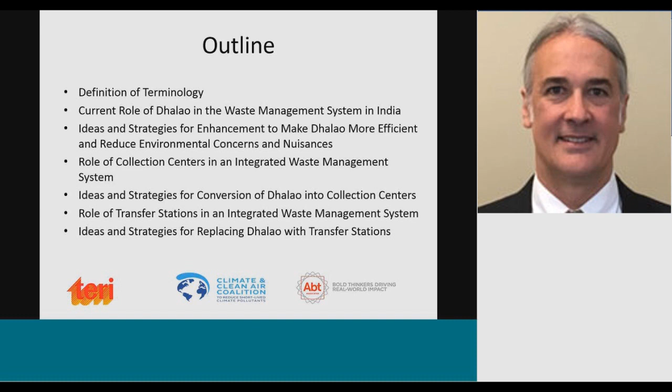I wanted to start with defining some terminology so we're all understanding how I'm using these terms today. A Dhalao is any form of a three-walled bay or bunker or building structure, typically constructed of concrete or block, and it's utilized for the collection and aggregation of solid waste from residential and commercial waste generators. Typically, the waste is tipped at the Dhalao manually by a municipal waste collector or cleaning staff, Safai Karamchari, and the Dhalaos are typically not equipped with any container.

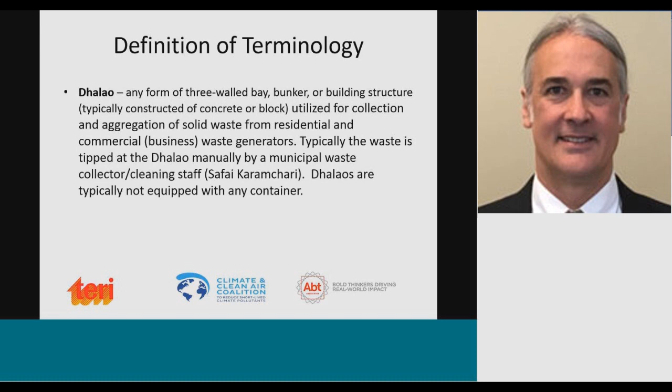A collection center is a facility established for collecting solid waste and recyclable materials from residents, and in some cases small businesses or institutions. This is a facility where individual residents can dispose of waste in bulk storage containers, and they're serviced by collection vehicles. A collection center typically does not allow commercial waste, and it does not have waste collection vehicles tipping waste there.

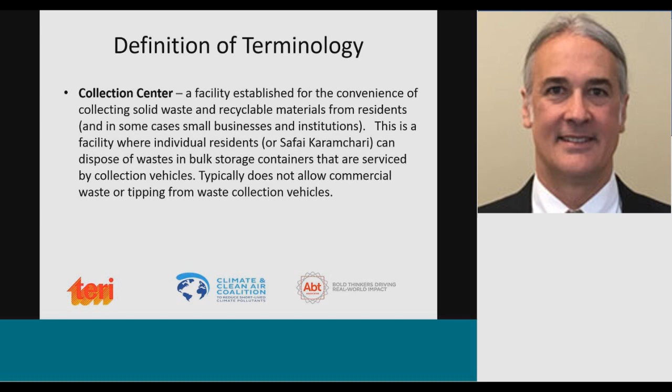And finally, to define a transfer station: it's any solid waste storage or collection facility at which the solid waste is transferred from collection vehicles to containers or larger long-haul vehicles for transportation to a central solid waste management facility for disposal, incineration, or resource recovery. Typically, transfer stations don't allow for manual tipping of waste, and they're not used by individual residents or businesses.

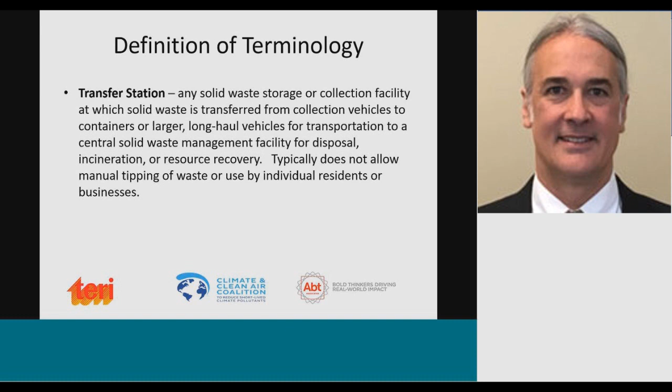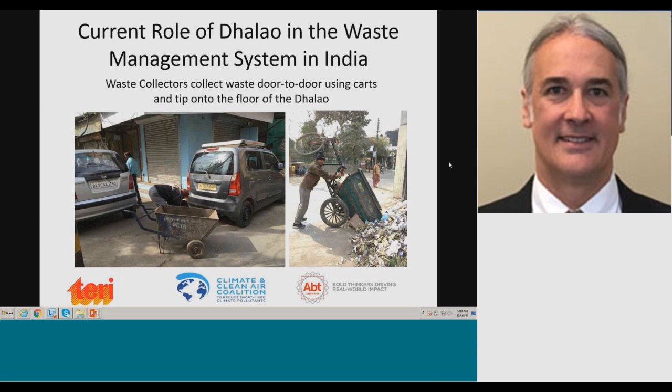The current role of the Dhalaos in the waste management system in India: waste collectors collect the waste door to door using carts of various shapes and sizes, and they tip it onto the floor of the Dhalao. The waste is aggregated from local neighborhoods and surrounding communities, and the conditions at the Dhalaos involve tipping solid waste directly onto the floor within the Dhalao and also in front of it for collection.

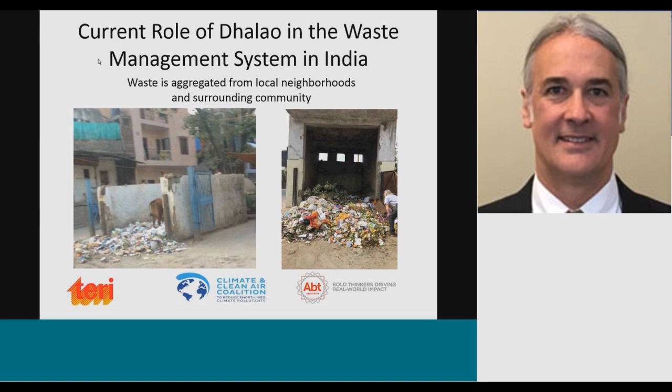Servicing the Dhalao requires a front loader and dump truck to extract the waste from the floor. This is an intensive process requiring multiple manpower and equipment in order to pick up the solid waste from within and surrounding the Dhalao using the front loader, then placing it into the truck to be transported to the disposal facility.

The challenges with the current role of the Dhalao are the inefficient handling of the waste multiple times. It generally has a relatively small storage capacity, and the waste is not containerized. It contributes to traffic congestion and unsafe conditions during servicing. It has to be serviced frequently throughout the day as the Safai Karamchari, the waste collectors, continue bringing waste to the Dhalao. There are nuisance concerns, odors, appearances, livestock and animals getting into the trash, and potential environmental and health concerns.

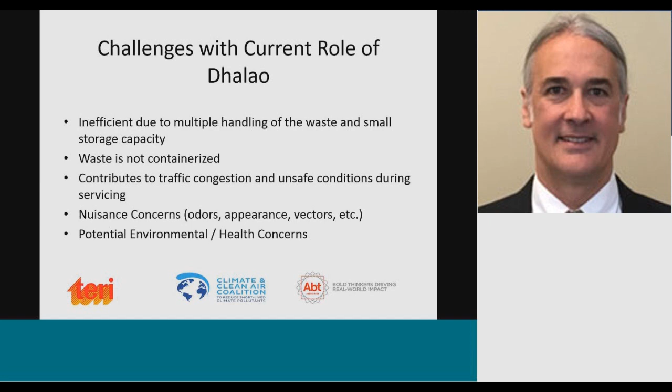Let's talk about a potential solution for enhancing the existing Dhalao structure. If you find yourself limited to utilizing your existing Dhalao and cannot expand for another type of facility, one idea is to insert a roll-off container into the Dhalao. The Dhalao comes in many different shapes and sizes, sometimes covered, and most of the time has at least 3 walls. One idea is to install a ramp.

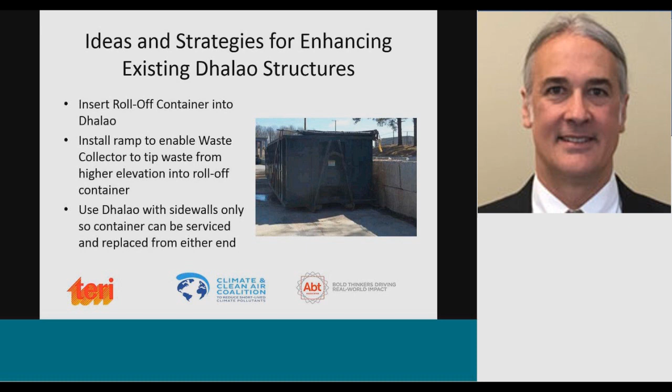In this photo, a block wall has been used to build up the elevation on the side of this container, and you can install a ramp to enable waste collectors to tip waste from their carts at a higher elevation into the roll-off container. You can use a Dhalao with sidewalls only so that the containers can be serviced and replaced from either end. It's important to get the waste containerized in the Dhalao, which makes servicing more efficient, because a roll-off truck can bring the container to the disposal facility and replace it with an empty one.

Along this same line of strategies and solutions, you can insert an actual compactor and associated container into the Dhalao. This requires electrical service to be provided, but it enables a more efficient operation. In this situation, the compactor is stationary and remains permanently at the Dhalao, compacting the waste.

Here you see a picture of a typical compactor. The container is the portion to the right, and that is the portion that gets disconnected from the compactor, and the truck removes it and provides a replacement container. What you see towards the left is the actual compactor that is permanent and stationary.

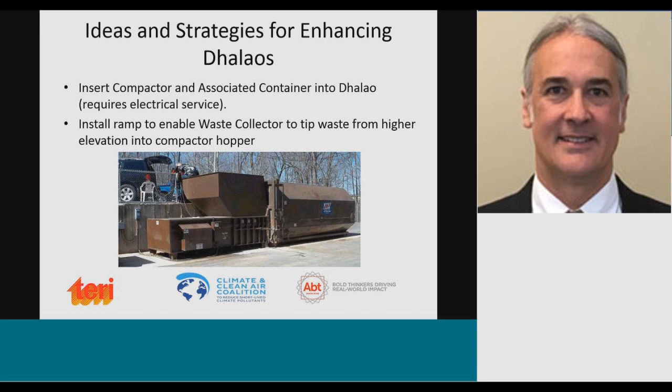This picture shows an example of a top-loading hopper, so you need a ramp to enable the waste collector, or perhaps individual residents and businesses, to place their waste from a higher elevation. If you cannot construct a ramp to achieve tipping into the hopper from a higher elevation, you can utilize an on-grade hopper for the compactor, so a retaining wall or any type of ramp is not necessary.

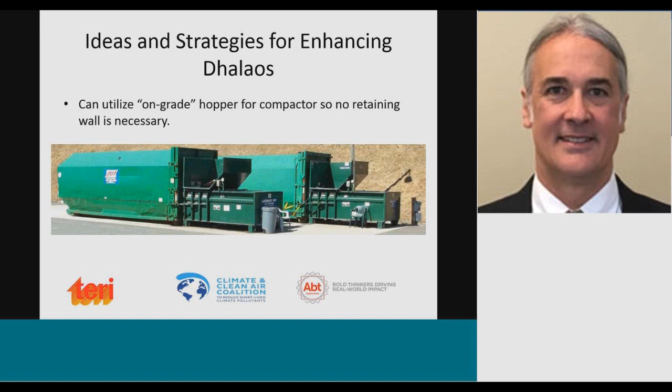I believe this improves waste collection efficiency from an enhanced Dhalao. It eliminates multiple handling of the waste and increases storage capacity to reduce the frequency of servicing. I believe one of the primary goals achieved is that the waste is containerized early in the process of collecting and transporting it to the disposal facility. Clearly, you've reduced the manpower and equipment during servicing. You no longer need a front end loader, and a single truck driver can operate the roll-off truck to remove and replace the containers or roll-off bins. You reduce traffic congestion and improve safety during servicing, and decrease nuisance concerns. The Dhalao doesn't have as much aesthetic problems, and it decreases potential environmental and health concerns.

So that's a situation where if you are limited on space and have to utilize the Dhalao, you can enhance it to make these improvements.

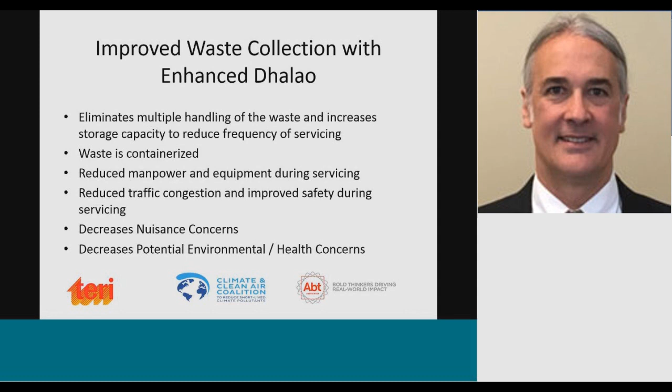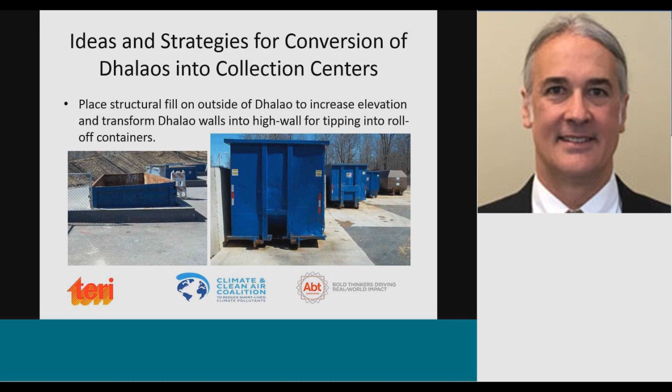Another idea, in order to achieve greater compaction of the waste within the container, is to utilize the compactor. Anytime that you can use a compactor, you will have greater density of the waste in the collection container, and that is more efficient for transportation, and you reduce the frequency of servicing. So an idea here is to transform the Dhalao walls into high walls for tipping the waste into a compactor hopper.

And again, here in these photos, you see examples. A hopper for a compactor can be from a top loading position where you will need to have some sort of elevation difference, or if that is not feasible in your situation, they do make hoppers where you can install them on grade so that the waste can be easily placed without needing an elevation change.

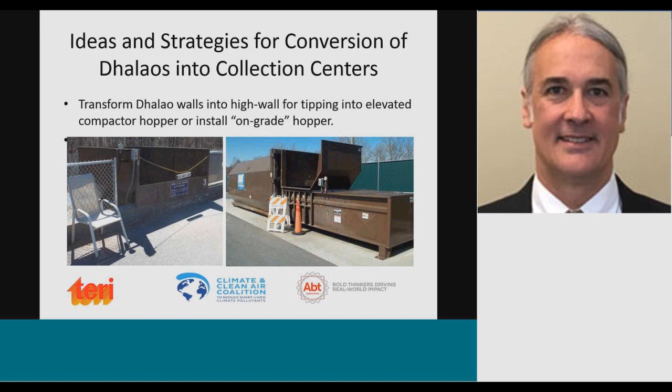Another benefit of the collection centers model is that you can introduce containers for recyclable materials where adequate space is available. And I recognize, having observed many of these Dhalaos, oftentimes there's not substantial space. They are positioned within the urban centers of cities and megacities. But any time that you can get a container which would allow segregation of recyclable materials, it would be beneficial to divert these materials from going to the landfill or other disposal facility.

Ideally, the collection center site would measure about 1/4 to 1/2 hectare and would have electric service in order to utilize these compactors.

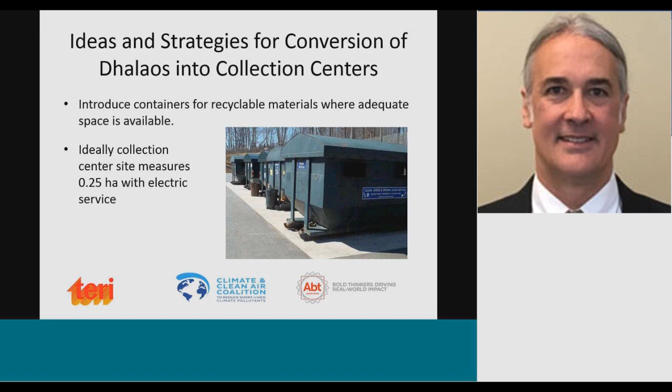Again, the advantages, I believe, with improving waste collection efficiency and introducing recycling with the collection center model, it's the same benefits as the enhanced Dhalao. It eliminates multiple handling of the waste, which is typically happening with the Dhalao type of structure, and it increases the storage capacity to reduce the frequency of servicing.

The waste is containerized. That's important. It reduces the manpower and the equipment during the servicing, which doesn't happen as frequently. It eliminates these nuisance concerns and eliminates potential environmental and health concerns, the runoff or releases of solid waste. And actually, the collection center model allows for separation of recyclable materials.

And finally, let's talk a little bit about the role of transfer stations in the integrated waste management system. Remember, my definition of a transfer station is typically where you're transferring waste from either small containers or actual vehicles, the collection vehicles, to larger containers and vehicles. So this is just in order to make the transportation be more efficient with the largest vehicle possible.

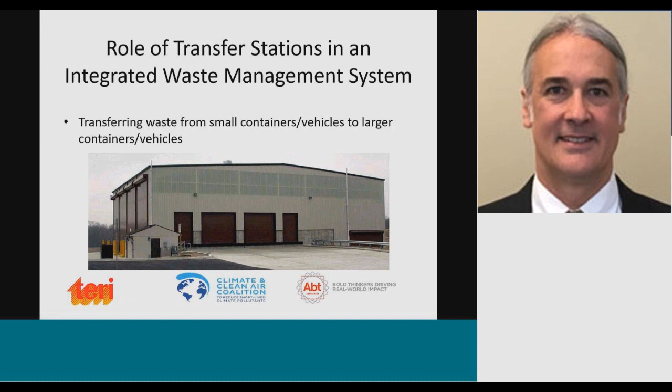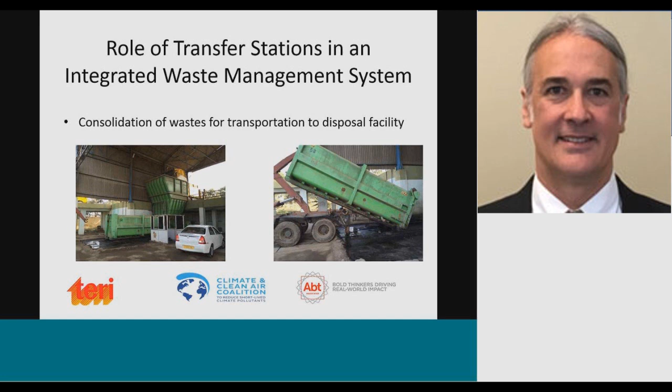On the left shows the compactor container in place and connected to the hopper. And then on the right, you see the process of the roll-off truck servicing the container by removing it and transporting it to the disposal facility, and it'll be replaced with an empty container.

So some of the ideas and strategies for replacing the Dhalao with a scientific transfer station in your integrated waste management system. Obviously, transfer stations require more area, and the site has to be larger than the very small footprint of the typical Dhalao.

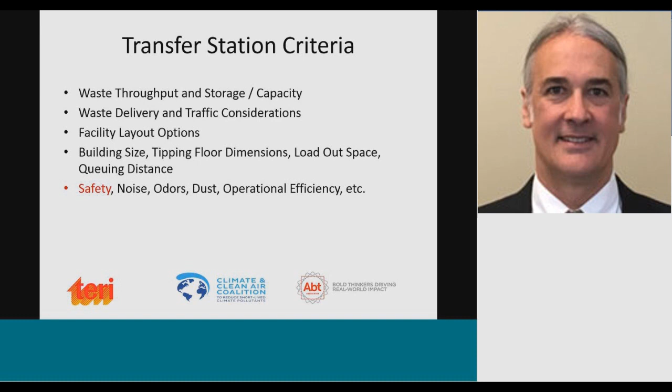And of course, operational parameters of these facilities include safety, noise, odors, dust, and operational efficiency.

Some of the structural characteristics to consider are the tipping floor, your push walls, and the manner of design of the transfer trailer tunnel. Transfer stations can use a partial tunnel, in which the front end loader has to reach up and place the waste into the top, or a full tunnel depth, where it's more efficient for just pushing the waste in. This depends on your site-specific design parameters.

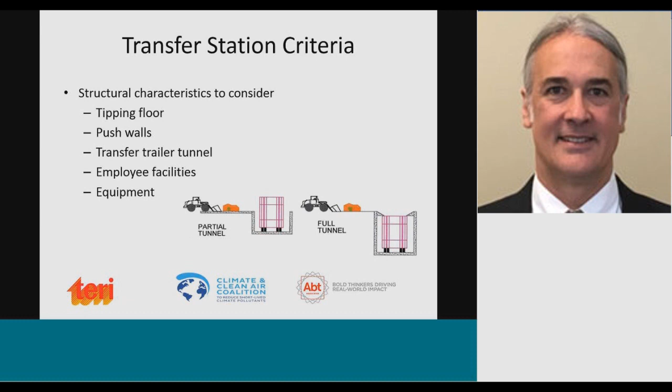Some of the transfer station design goals we typically attempt to achieve include counterclockwise traffic flow, one-way traffic movements. You want to minimize your cross traffic, and you want to segregate your commercial haulers and self haulers that are coming with smaller loads of waste.

If you can separate the large vehicles from the small ones early on in the facility, that works better. You also need to accommodate for vehicle staging, have your site amenities, and at all times be thinking about safety and efficiency.

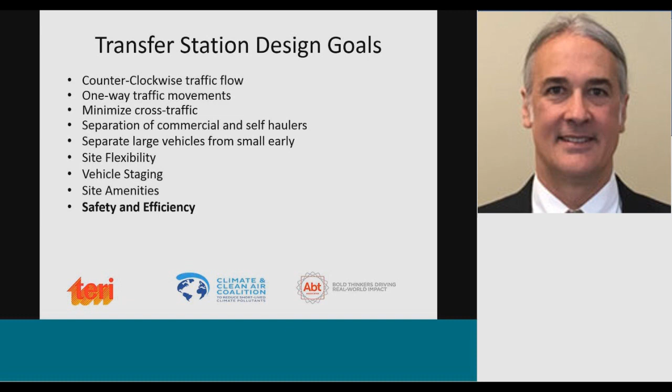The vehicles that service the containers and remove the waste from the facility are on a separate roadway, a different path. Then you have space for the additional trailers or containers to be placed and stored on the site, and adequate parking for vehicles that are bringing the waste to it.

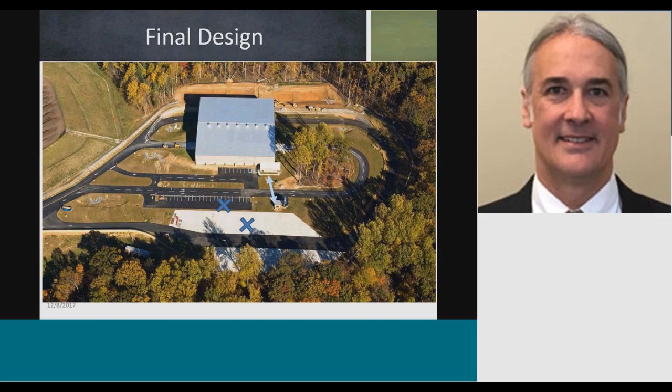Good afternoon, it's a pleasure to be here. I've tried to make it in a simple manner, although apparently it appears to be very simple. But if you actually have to do this, it's going to be a very, very difficult task. In our actual situation, because we have a lot of congestion in our cities, road access is also a difficult issue.

So let me move on with my presentation. What I've done here is try to describe the actual situation and what should have been as per our rules, the ground reality for the Dhalaos or collection centers vis-à-vis the transfer station, which even now is a very loosely termed topic, because we have very few properly designed, so-called modern transfer stations. There are others that are called transfer stations, but if you go there, you'll find it's only an open field where the work is actually being done.

So coming to my presentation, ideally solid waste should be collected from the point of generation in three different streams, as per our rules, and taken to the respective processing, recycling or disposal site, excluding construction and demolition waste. This is as per the Solid Waste Management Rules 2016, notified by our Ministry of Environment, Forest and Climate Change last year.

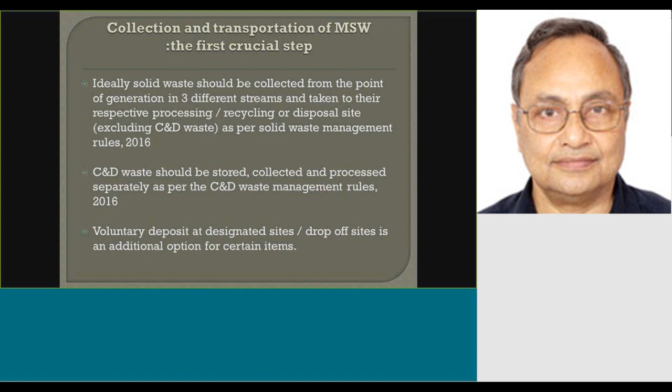Voluntary deposit at designated sites or drop-off sites is an additional option for certain items. This is how it should ideally be done with respect to Indian towns and cities. Now what is the reality? What actually happens at most places is quite different, often not efficient or desirable.

Mixed waste is thrown or deposited in and around municipal bins at best, or thrown inside a drain at its worst. If it's thrown inside a bin, we think that is the best option. That's the kind of scenario we have.

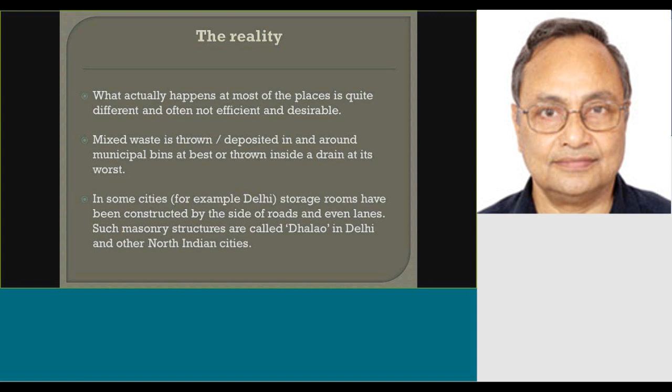In some cities, for example Delhi, storage rooms have been constructed by the side of roads and even lanes. Such masonry structures are called Dhalao in Delhi and other North Indian cities, and it has become a very common term in this part of the country. The Dhalao, or intermediate neighborhood storage facility, is a common feature of municipal solid waste storage and secondary collection, very much ingrained in our waste management life.

Usually these are masonry structures where municipal solid waste is dumped by small vehicles and even mule-back, as Bob has also described. Usually there is only one large opening which is used as both entrance and exit. In many cases, they are very dilapidated structures.

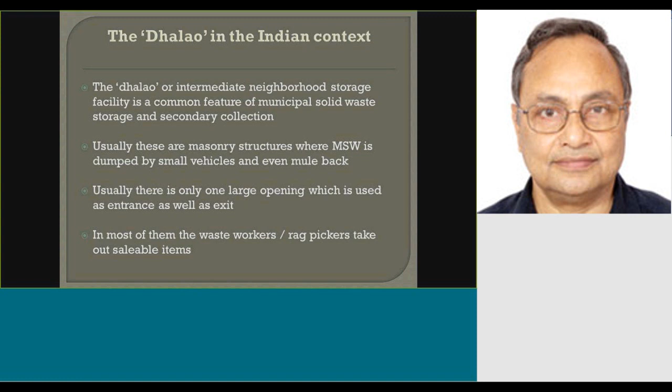In most of them, the waste workers or rag pickers take out the saleable items depending on what they deal with, taking their share. The remaining waste matter is picked up by municipal vehicles and carried to the processing or disposal facility, which in most cases is the dump site. In some cases, material is taken to an intermediate transfer station, which may even be an open ground. Thus, the Dhalao also represents a case of multiple handling of waste.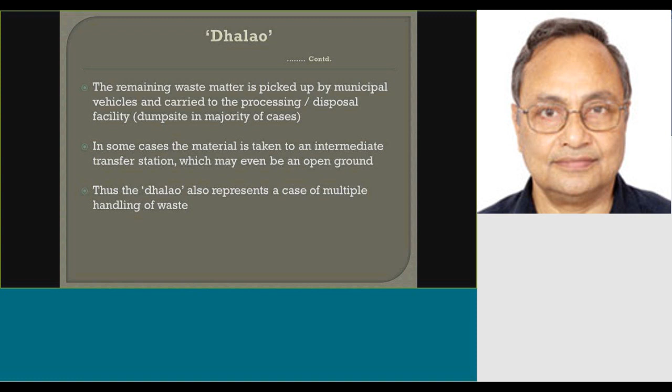Now just to give a glimpse of the primary collection and some transfer options, very briefly: this is how a transfer truck, a small truck, very small — I think this is a Tata 600 or something — is used for primary collection.

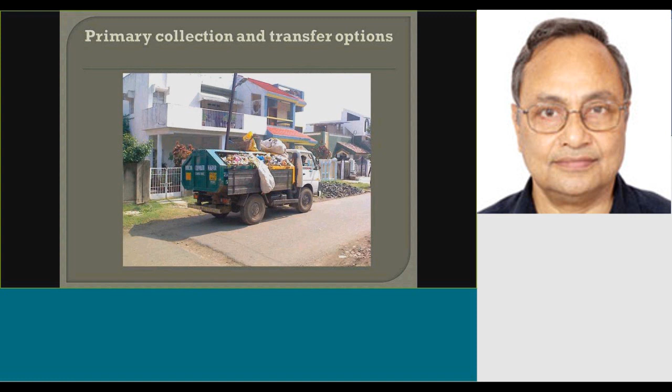You can see bags jutting out or hanging from the side, containing different recyclable or saleable items. This is normally how collection is done from the doorstep. One transfer option is to tip it directly into a bin, as you can see happening here.

Of course, if this is done by the roadside, a lot of dust emanates, which is not a good thing. This is another way of doing it: a contraption lifts the bin to a height so it can be tipped into the back container of the refuse collector and compactor. So it goes directly into the bin and is then taken up by the compactor.

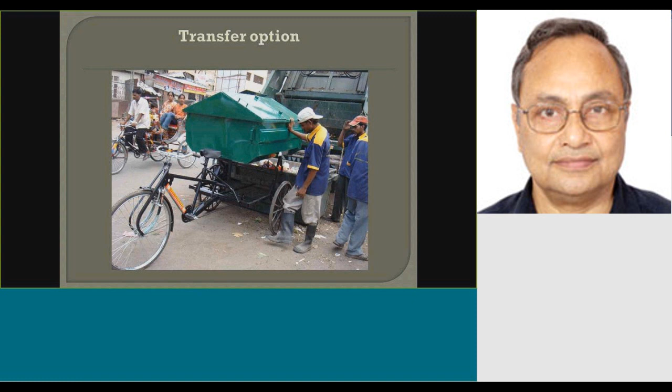Now, the municipal solid waste transfer station is an intermediate place where solid waste collected by small vehicles is transferred to larger vehicles for ease of transport of large quantities over long distances. This arrangement has the potential to make the system faster and more economical, since larger vehicles carry more waste, also positively impacting road congestion.

In most of our congested localities or wards, it is not possible to bring even small motorized vehicles, so the transfer station has a role to play in that context too. Doorstep collection is done by three-wheel vehicles, small four-wheel vehicles, or even small hand-drawn carts.

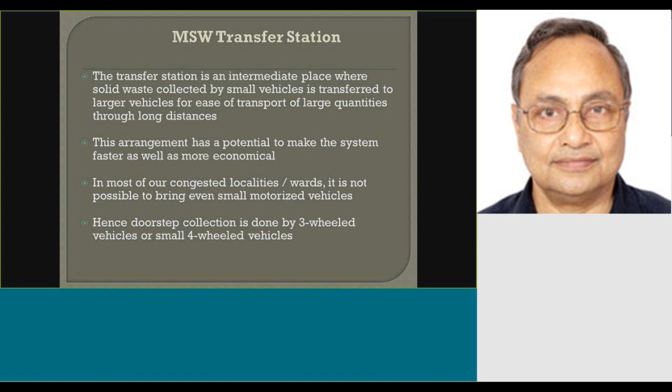These vehicles deposit waste at the transfer station, and larger vehicles and bulk carriers pick up the waste to move it longer distances — typically we try to do this for more than 15 kilometers, looking at the economic side of the project. Transfer stations can be of different types, as mentioned in later slides.

But in India, even an open space where waste is dumped, kept for some time, and then sent by larger vehicles is often called a transfer station. Personally, I have seen that these open fields are possibly the largest in number — or if you take the percentage, possibly the largest percentage of transfer stations.

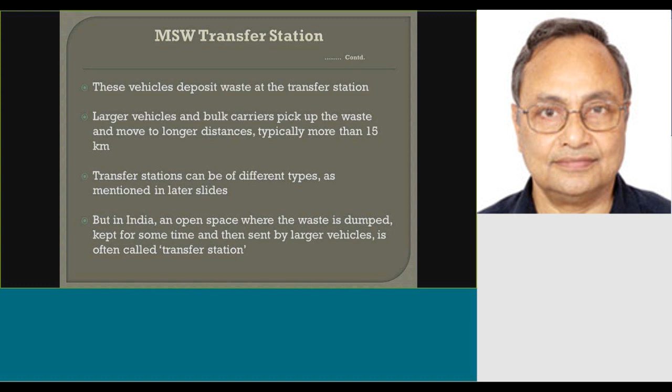Normally, large modern transfer stations are designed as split-level facilities, as Mr. Dick has also shown. A ramp leads smaller vehicles up to the unloading points, from where waste is deposited into larger vehicles or bins through hoppers. Modern transfer stations are equipped with stationary compactors so that more waste can be packed into the receiving bin or vehicle.

The total area required is quite large. Typically, for let's say 500 tons, one would require anywhere between 0.3 to 0.5 hectare. That's a pretty large chunk of site inside a city. And outside the city also, we have transport issues. So therefore, land or site remains a big constraint.

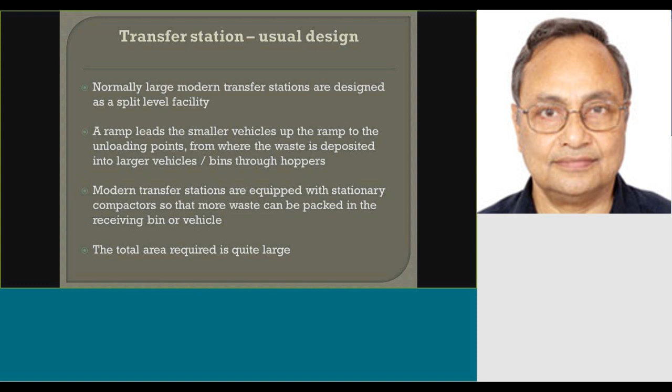So this is a split-level modern transfer station. This is just a schematic, and it shows very clearly how it happens. The smaller vehicles, or even very small three-wheeled mechanized carts, move up or drive up the ramp to the top level or first floor level, and then they drop the waste, and the larger vehicles, shown on the right-hand side picture, drive out with the filled waste.

So this appears to be a simple system, but actually there are issues, because first of all you have to find so much land. Secondly, the construction is pretty expensive because a lot of civil construction is involved. Of course, the electrical power requirement is comparatively less, because that is replaced maybe by a little more automobile fuel, diesel in most cases. So the construction cost is quite high.

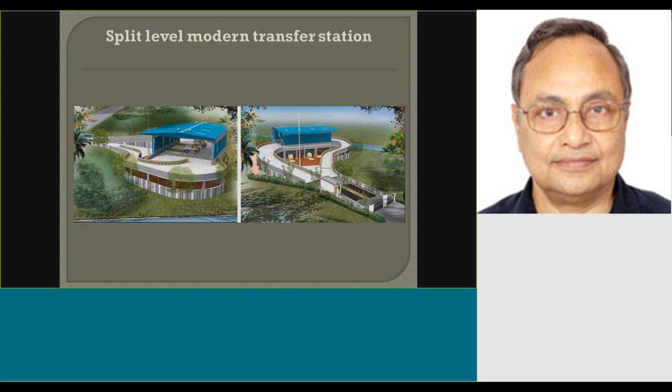Now another variation, this is in the Indian context. This is a compact transfer station. I have coined this term, compact transfer station. Normally this is not there, but we built it. We built a system at Nagpur, in the city of Nagpur. So this compact transfer station was designed and implemented at Nagpur.

At the designated site, a transfer station of 100 ton per day capacity was required, but the available site was only 850 square meters. That's all. And at the back of it, there was a huge water reservoir, and on the other side there was a weekly market place. So this was a very constrained kind of site.

First, efforts were made to design a split-level transfer station using a concrete ramp, but the site was quite inadequate to accommodate the ramp with a certain gradient. You cannot go beyond a gradient of, let's say, even 14 or 15 degrees, because then the vehicles would start slipping back. And at least two large vehicles are needed for further carriage, so one empty would come and the other filled one would drive out, meaning there should be space for at least two vehicles. So this was not possible within this site.

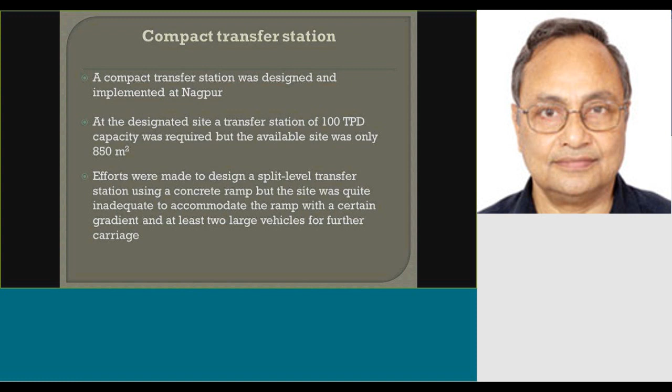So then we had a lot of brainstorming, and eventually we planned to design a single level transfer station equipped with a powerful static compactor with a large hopper and a set of sturdy compaction bins, each with a capacity of about 18 cubic meters. A conveyor was designed to carry material from a ground level receptacle to the top of the hopper. The material sliding down the hopper was pushed inside the bin while forcefully compacting it. These equipment are available, but this design was done specifically there.

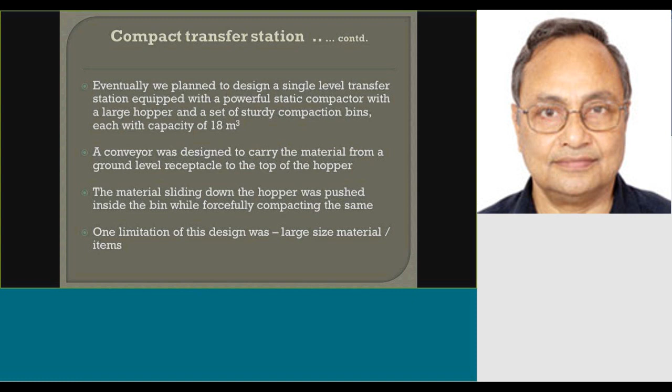One limitation we found was with large size materials or large items. They were difficult to handle with this kind of system because the conveyor belt also had a certain width, and the materials had to fit through and go into the hopper before being pushed at the bottom. So all that constrained the size of the material that could be handled.

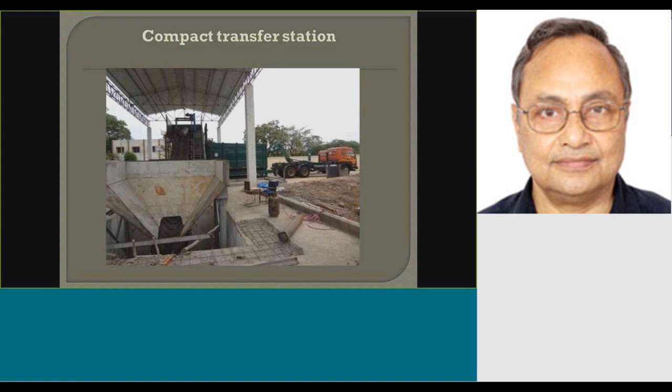This is after it was constructed. So you can see the conveyor belt and the compactor, the static compactor, and the compactor bins. These bins are very, very sturdy.

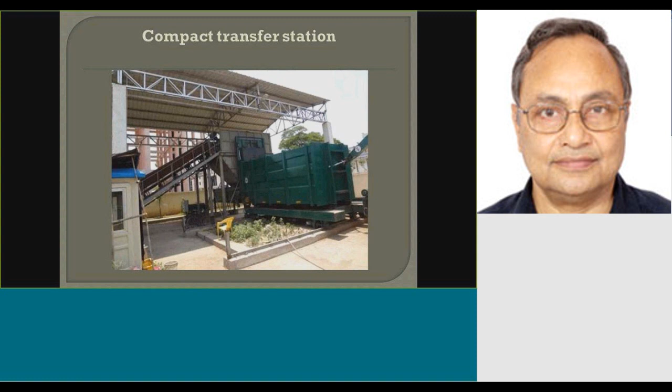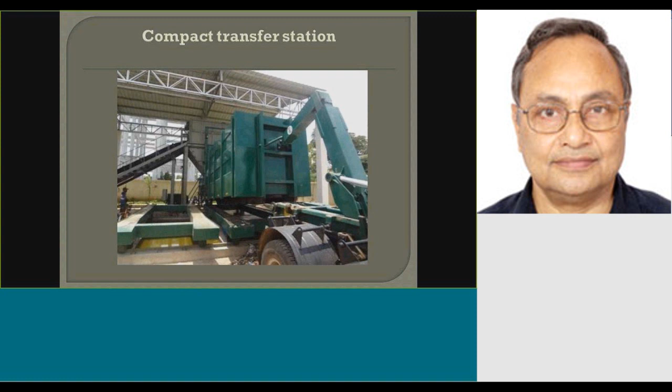Now the hook loader arm is picking up this compacted bin filled with waste. It has drawn it towards itself. We have two rails there, one on the right hand side on which this bin was there, and on the left hand side another empty one should have been there, but we did not put it there because I wanted to take this photograph, so it was not landed over there. Otherwise these two bins are always there, one getting filled and the other empty one just parked. So this worked pretty well.

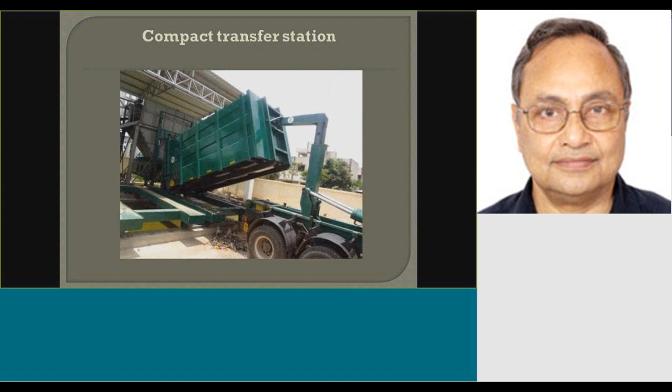The only limitation was that large size materials and very light materials like plastic sheets also come in. Large sheets of plastic just jumble and sometimes create difficulty on the conveyor belt. Normal material with a density of 0.4 to 0.6 or 0.7 behaves very, very nicely.

Now the other thing Mr. Dick had mentioned and shown is the portable compactor. In this case, the compactor is part of the bin. The motive force is supplied by electrical connection, and there is a loading bucket which can be lowered onto the floor or road level. This bucket receives waste carried by wheelbarrow or small vehicles, and then the bucket is pulled up by a lever.

The waste is deposited inside the bin. Now the compactor inside the bin keeps on compressing and compacting the waste, and more waste is deposited. It's an ongoing process and the sequence goes on. These bins have strong steel wheels on one side so that they can be pulled up just like a roll-on, roll-off, and then a hook loader pulls up the whole bin along with the compactor and carries it away.

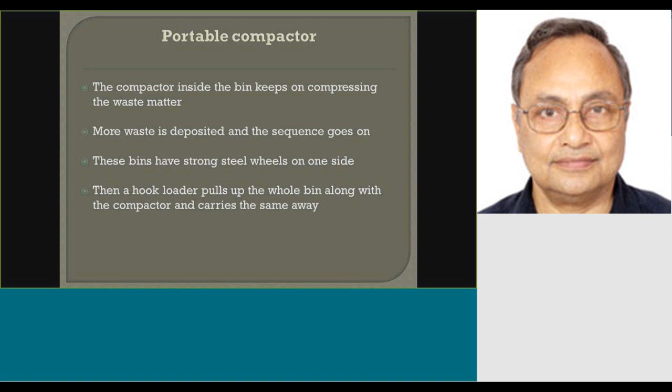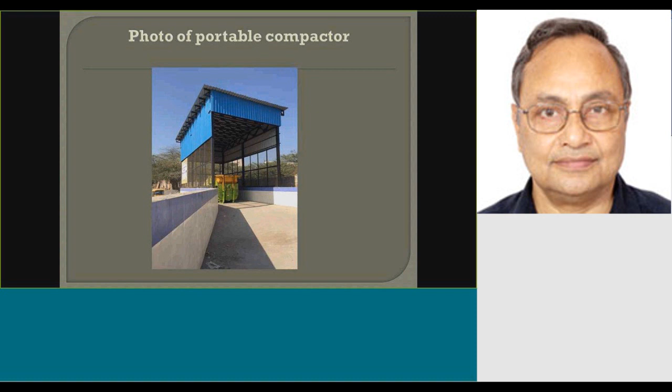This is actually the compactor bin. The yellow portion is the front end bin, which is lowered onto the ground, and then small vehicles deposit or tip the waste into that bucket. As soon as the bucket is nearly filled, it moves up and deposits the waste inside the bin, and then the compactor moves on and the bucket comes back. This sequence goes on as such.

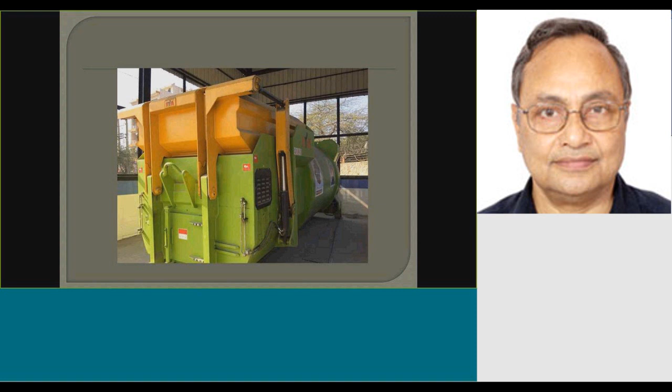Now, the issue of converting a Dhalao to a transfer station. A Dhalao is much smaller in footprint and size than a transfer station. On the other hand, some transfer stations have segregation facilities apart from the role of shifting waste from smaller to larger vehicles. Of course, these take a lot of space, typically from 0.5 to 1 hectare.

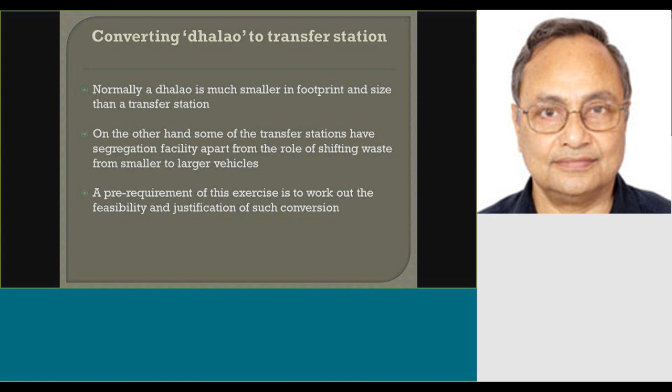That kind of land is extremely difficult to find inside a city or even on its periphery, because one has to see the logistic factors as to where to put the transfer station so that it is techno-economically viable. A pre-requirement of this exercise is to work out the feasibility and justification of such conversion, that is, conversion of the Dhalao into the transfer station.

This will depend on the area available, which is the most important thing, neighborhood population, population density, road access and width of road, and further destination of the shifted material. Because apart from the site, road access is extremely important here.

While planning such a facility, this is, I would say, very, very difficult. We have actually faced this while doing such work. I have faced this in a number of cities. While planning such a facility, dialogue with the neighborhood and interactive planning is very important for success.

This part is extremely difficult, because to talk to people, to have a dialogue with them and bring them to your side, to convince them that yes, this is going to improve their situation, is very, very difficult. And more so because we don't have a good history of such things, which makes it harder to convince people.

Finally, the life cycle cost needs to be looked into to take the decision, and the ULB has to initiate this. Every Dhalao cannot be converted into a transfer station. This workout has to be done meticulously.

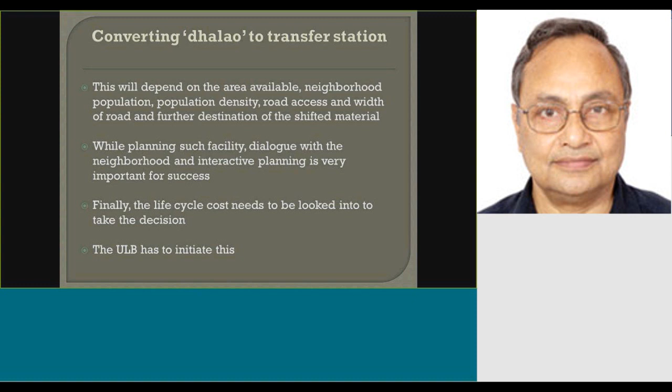Personally, I would feel that one should start only with samples, say 1 or 2. See after the conversion what the result is, what the feedback is, and after that one can step up the conversion process. And if you look at the distances, that is the small vehicle distance and the large vehicle distance onward from the transfer station, then you have to see where exactly a transfer station can be justified. Those are very important issues as such.